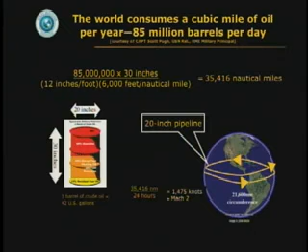Now take out all the bends, so it's simply a 20-inch pipeline 1.5 times around the world. And to get 85 million barrels to flow that distance in 24 hours, they have to be going at Mach 2, twice the speed of sound. That helps you visualize that much oil flow.

And this naturally gives rise to various problems. So a lot of unlikely folks have been popping up lately to say we've got to do something else, for many good reasons. But I want to start with a little bit of economic history.

In 1850, the fifth biggest industry in the United States was whaling, and most houses were lit with whale oil. But as whales gradually got shy and scarce, and first the sperm whales and then the other kinds started to get pretty hard to find, the price of whale oil drifted up, eliciting competition from a lot of things, but most of all, oil and gas, both made at the time from coal.

Remember, this is long before Edison's electric light. And in the 9 years before Drake struck oil in Pennsylvania in 1859, that competition grabbed away from whale oil over 5/6 of the lighting market.

The whalers were astounded to run out of customers before they ran out of whales. They hadn't been paying any attention to the competition. They were soon reduced to begging for federal subsidies on national security grounds, and the remnant whale populations were saved by technological innovators and profit-maximizing capitalists.

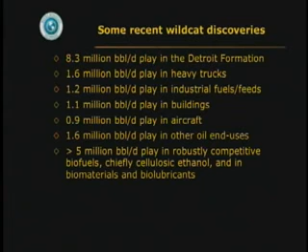So my wildcatters have been out drilling lately, and they found 8.3 million barrels a day in an undrilled play under the Detroit Formation. And they found 1.6 million barrels a day in heavy trucks, and 1.2 in industrial fuels and feedstocks and so on. Altogether, a huge amount of negabarrels down there, savable oil, plus a big play in robustly competitive biofuels, and 12 trillion cubic feet a year of gas that we found in places like air conditioners.

More on that later. So shouldn't we drill the most prospective plays first? I mean, wouldn't it be kind of embarrassing to go to the ends of the earth to drill for very expensive oil that might not even be there, and somebody else finds all that oil lurking under Detroit?

So in 2004, we published a detailed study that's independent and peer-reviewed. All the numbers are clearly laid out. Nobody's argued with it. And it was co-sponsored by the Office of the Secretary of Defense and the Chief of Naval Research, written for business and military leaders, not for politicians. They can hear about it in due course from their constituents.

And we built the argument around competitive strategy business cases for cars, trucks, planes, fuels, and military. You can get the whole book and all its 24 technical backup annexes free at oilendgame.com. And its thesis is arrestingly simple: that over the next few decades, say by the 2040s, this country can eliminate its use of oil and have a much stronger economy, and that transition will be led by business for profit.

Here's what it might look like. The upper red curve is the use of oil, the lower dashed red line is the imports of oil to the United States, and in the official forecast they keep heading toward the northeast corner. But we showed how to turn these curves downwards along the green curve by redoubling the efficiency of using oil, already doubled since 1975.

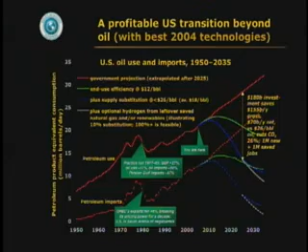At the same time, as a free byproduct, it would cut America's CO2 emissions by 26%. It would get us 1 million new jobs, mainly in rural and small town America, doing the biofuels. And we'd get to save 1 million jobs now at risk, mainly in automaking, where we have a really simple choice: do we want to keep importing efficient cars to displace oil, or do we want to make efficient cars and import neither the oil nor the cars?

That somehow sounds like a better idea. We found the business case for these actions is so compelling that this strategy could be implemented without new fuel taxes, subsidies, mandates, federal laws, or anything else either party doesn't like or could mess up. That is, such public policy as is desirable to support rather than distort the business logic could all be done administratively or at a state level.

Now, technologically, the nub of the problem is, of course, transportation. Vehicles use 70% of the oil. But we found that a common technological strategy of low mass, low drag, and advanced propulsion could triple the efficiency of cars with a 2-year payback, trucks with a 1-year payback, and planes with a 4 or 5-year payback.

Often with improved performance, for example, this Opel carbon fiber diesel hybrid Eco Speedster would get 155 miles an hour and 94 miles a gallon, although not at the same instant.

And the surprise to many is that the ultralighting that doubles the efficiency of these carbon fiber concept cars is free, because the costlier materials, as I'll explain, are paid for by simpler automaking and a 2 or 3 times smaller propulsion system. There are, of course, other big savings in buildings and industry, but I've talked about those the last 2 nights and won't revisit them here.

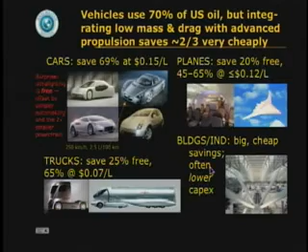Let me concentrate just on cars, then on trucks and planes. And the technology for all of these kinds of efficiency is continuing to improve faster than we use it up, so that efficiency, unlike oil, is an ever bigger and cheaper resource.

Of the projected increase in the use of oil in this country to 2025, 70% of it is from light trucks and heavy trucks. So you won't be surprised that I'm going to say a bit about both of those. You can see the use projected for cars is essentially flat, and the second biggest growth area after trucks is air travel.

Just a word on basic automotive physics, because I know there are a number of engineers and physical scientists in the house.

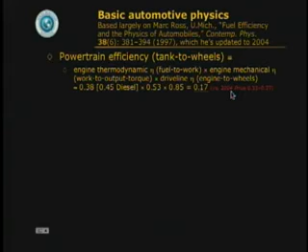The powertrain efficiency from the fuel in your tank to the wheels of a car or light truck is the product of the fuel to work efficiency of the engine, times the work to output torque efficiency of the mechanical part of the engine as opposed to the thermodynamics, times the driveline efficiency in transmitting torque from the engine to the wheels. And with an auto engine running on gasoline, as opposed to the somewhat more efficient diesel, this works out to about 17%, although a modern Prius hybrid does about twice that well, if you drive it properly rather than the way Consumer Reports says to.

Now, the vehicle load, what it takes to move the vehicle, technically known as the tractive load, is almost all of the energy you have to get out of the fuel, but a few percent is to run accessories, air conditioning, lights, entertainment, and so on.

The tractive load, in approximate terms, in instantaneous mechanical power, has four elements. The inertia is what it takes to accelerate the car, which depends on its weight. It's F equals ma. Then there's the rolling resistance experienced by the tires, which again depends on the efficiency of the tires and how hard you press down on them, which again depends on weight.

Aerodynamic drag rises as the cube of speed, and if you're climbing a hill, you have to allow for that too. I'll neglect it from here on the assumption that uphill and downhill balance over time. Both the inertial and the grade loads can be negative if you go downhill or decelerate, and a Prius, for example, recovers that energy with an efficiency of two-thirds from wheel to wheel.

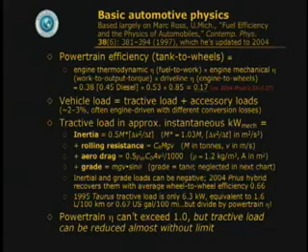Now, it only takes about 6 mechanical kilowatts of tractive load to run a Taurus, which is equivalent to two-thirds of a gallon per 100 miles. That's awfully good. But you have to divide by the powertrain efficiency, so it's 6 times worse than that. The important thing to remember is that you cannot make the powertrain more efficient than 100%, but you can reduce the tractive load almost without limit by making the car lighter and more slippery.

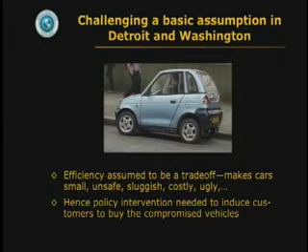I think the U.S. laggard position comes from the basic assumption held by most people who make cars or car policy that to make cars efficient, they have to be squinchy, unsafe, sluggish, costly, ugly. You wouldn't really want one. So the government has to induce you to buy this compromised vehicle anyway through either efficiency standards or high gasoline taxes. And of course, the titanic lobbies behind these two positions, automakers favoring high gasoline taxes, oil companies favoring high CAFE standards, have battled each other to a draw for over 20 years.

But there's another way to think about technological change. How many of you still buy phonograph records as opposed to digital media, or cathode ray tube televisions instead of flat screens? When you improve the technology enough, you can do an engineering end run around normal considerations just by redefining market expectations.

So you'd want to buy the super efficient car, efficient as a byproduct of breakthrough engineering, because it's better, not because it's efficient. That would give automakers a much more robust business model, because they would only need to worry about competitive superiority rather than random variables they can't control, like oil price and public policy.

So to see how to do this, let's look at the physics of where the gasoline energy goes, bearing in mind that your car every day burns roughly 100 times its own weight in ancient plants.

Well, seven-eighths of that precious energy never gets to the wheels. It's lost in the engine, idling, driveline, and accessories. Of the one-eighth that does reach the wheels, half of it either heats the tires and road or heats the air that the car pushes aside, and only the last 6% actually accelerates the car and then heats the brakes when you stop.

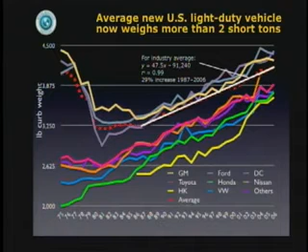We have a lot of relearning to do, because here's what's been happening to the weight of cars sold in the United States, cars and light trucks actually. They now average over 2 tons. We even looked, thanks to our analyst Laura Schul, at something I hadn't seen graphed before, which is the density of cars and vans, namely their curb weight divided by their interior volume. You notice it's been going up.

Density? How does that help anything?

70% of this increase in weight that we're seeing is due to design and materials, only 30% to changes in the size and the mix of vehicles bought.

Well, if you want to make cars lighter to capture the basic physics advantage, there are 3 broad things you can make it out of. Light metals like aluminum, which are perfectly feasible, a bit more expensive. New generations of light steel, special alloys, and heat treatment. Or the strongest and lightest solution, advanced composites, reinforced, for example, with carbon fiber.

That's what this handmade SLR McLaren from Mercedes is made of. It happened to get T-boned by a Golf, which was totaled. All that happened to the McLaren is it popped off a side panel, which they'll pop back on and fix the scratch later. But if you were to look under the hood, you would find at the front corners there's a pair of...

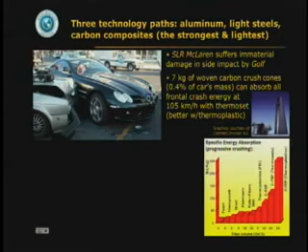...about 7 kilogram woven carbon fiber crush cones. To crush these down into a kind of a plastic cow patty takes so much energy that these cones, weighing only 0.4% as much as the car, can absorb the entire crash energy of the car hitting a wall at about 65 miles an hour.

That, by the way, is with a thermoset composite, like epoxy, which absorbs only half the crash energy per pound of a thermoplastic composite, which I'll be talking about. That absorbs 12 times the crash energy of steel per pound, and it does so more smoothly, so you can use the crush length or stroke up to twice as effectively.

So with such magic strong but light materials that decouple size from weight, you just solve the safety riddle. That is, you can make cars big, which is protective and comfortable, without also making them heavy, which is hostile and inefficient. Therefore, you can save oil and lives and indeed money all at the same time.

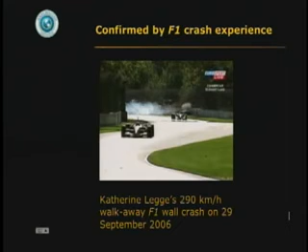Anybody who follows the Formula One race world knows about this. Here's a shot of Katherine Legge running into a wall in an ultralight carbon fiber car at 180 miles an hour.

By the way, her car is made of epoxy carbon or thermoset, which is subject to brittle fracture, and it's not nearly as tough as our thermoplastics. But, you know, that's not very promising with a person in there. And the best news is that Katherine Legge has walked out of the medical center under her own power.

How are you feeling? A bit shaken, but I'm okay, as you can see. Oh, sorry, all my bits are intact, so it's good. Goes to show how strong the cars are. Where do you have some injuries? Oh, I just banged my knee. Car upside down, you bang your legs on the bulkhead and on the steering column and stuff, so just a bit of bruising, which won't look too attractive in my dress at the Atlantic's banquet tonight, but...

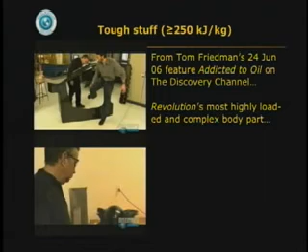So, and in fact, Tom Friedman, in a film called Addicted to Oil on the Discovery Channel, was playing with some of these materials in the lab of a little company called Fiberforge that spun off from RMI. And first of all, he took the most complex and highly loaded body part, and showed that he could lift it with one hand.

I can't lift this. Sure you can, it's not steel, it's carbon fiber. Whoa! I'm strong, I'm not that strong.

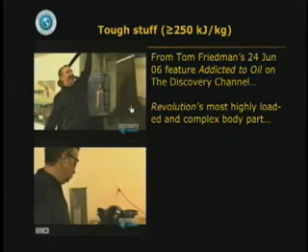And then he tried to do some damage to this piece of material, which is actually tougher than titanium. So here's the part we just formed, Tom. But once it's trimmed, it can look just like these other parts. You say these things are tough, right? Oh, they're very tough. You're gonna see just how tough.

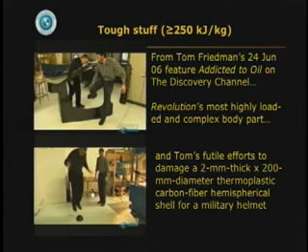I'm gonna break one of these. Just plastic. You want to try jumping on it? Sure. Here, why don't you try jumping on it on the floor? Somebody got a bigger hammer? Here, give me that.

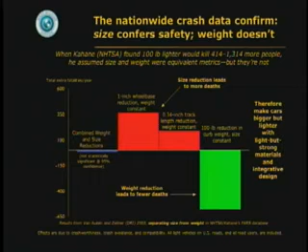Now, the problem with these advanced composite materials has always been cost. We use them a lot in military and aerospace at about 1,000 times lower production volume and higher cost than you would need for ordinary cars. In fact, the advanced composite market in the U.S. is about as big in tons as the chocolate market. This is pretty specialized stuff.

But then I got encouraged about maybe bridging this cost gap when I met a young engineer at the Lockheed Martin Skunk Works, where they make the not quite impossible military aircraft. He had led a team that in the mid-90s had designed an advanced tactical fighter plane airframe that was 95% carbon, 1/3 lighter, but 2/3 cheaper, because it was designed to be made optimally out of carbon, not metal.

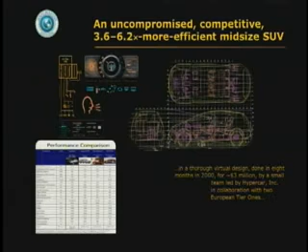It was so weird he couldn't find a military customer for it, so one batch later I was able to hire him to lead a similar effort for cars, which we did. The result was an uncompromised, competitively priced, 3.6 to 6.2 times more efficient midsize SUV, done as a virtual design with 2 Tier 1 partners in Europe in 8 months in the year 2000 for about $3 million.

And here's what it looks like. This is a 5-seat, mid-sized suburban assault vehicle, weighing a little less than half as much as the equivalent steel vehicle, because it would be made out of carbon fiber composites.

0 to 60 in 8.2 seconds, 114 miles a gallon on hydrogen fuel cell, or if you ran it on a gasoline hybrid like a Prius engine, it would do 0 to 60 in 7.1 seconds and 67 miles a gallon on gasoline. And that version would have an extra sticker price of $2,500, as we ascertained from actual bids for parts, as I'll tell you later.

That would pay back in under 2 years at U.S. gasoline prices. So this was production costed, manufacturable, and it can look like whatever you want. This is what's called in the trade the active outdoor lifestyles Gen X, Gen Y crossover vehicle, at a time when crossover vehicles were kind of a gleam in the eye.

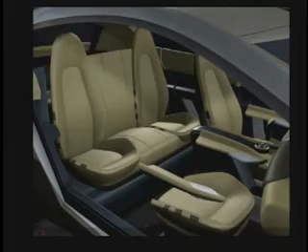Now there are a lot of things on the road that look very much like this. We're flattered. If you were to fold down the right seats as well as the rear seats, it gets so cavernous you can put in 2 full-sized kayaks and 2 people.

We'd prefer to control and steer it with a left side stick, or if you're British or Japanese, you can stick them on the right. There's a virtual display, everything by wire or by fiber, all functionality in software. It's a computer with wheels, not a car with chips. Sony PlayStation 10, way cool.

But it has some other interesting attributes. I mean, if all U.S. cars were this efficient, cars and light trucks, it would be like finding a Saudi Arabia under Detroit. And worldwide, the potential from this kind of efficiency is as much oil saved as OPEC now sells. So that's a big deal.

And again, to get back to the physics, an ordinary car takes about a liter of fuel to drive 12 kilometers on level city streets, but you see only, in this case, about 12% gets to the wheels.

The industry has always focused on the losses, 85% loss or so, in the powertrain for the same reason Willie Sutton robbed banks. He said that's where the money is. This is where the losses are.

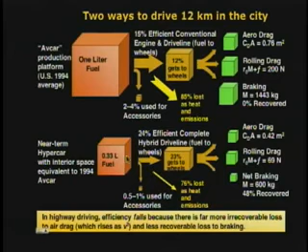But you'll appreciate from the last two nights' lectures where I've emphasized the compounding savings from starting downstream that we should really start at the wheels, because every unit of energy we can save at the wheels will save about 7 times that much fuel in the tank, turning those compounding losses left to right into compounding savings right to left, just as in the pumping diagram I showed last night. It's pretty straightforward, even with a doubled efficiency powertrain, where that's only a factor of 3.5 gain, not 7, to get a tripled efficiency car this way.

Of course, to get the real weight savings like this, you need to multiply weight savings and make them snowball. It used to be that you just do this once. You would make the car as light and slippery as you could think of, so you need less power to run it, and that lends itself to a smaller propulsion system, maybe with new technology, and the chassis parts like brakes and suspension get smaller. And because those things are all smaller, you can have more crush space in the same size car, more space for people and cargo as well.

But you might think it costs more for all the obvious reasons. What we do, however, is work the design cycle, or as they say in naval architecture, the design spiral. You go around this loop a few more times, and as you do so, you start multiplying weight savings, because you're not only making parts smaller for lower mechanical loads, you're getting rid of a lot of parts. In a good hybrid, you may, for example, eliminate things like transmission, clutch, flywheel, axles, differentials, drive shaft, universal joint, starter, alternator. They just go away with their weight. Therefore, you get these nonlinear jumps in weight savings.

And by the time you get through, you're using so little of the costly light materials, such a small powertrain, and you save so much money in simpler assembly and getting rid of parts and systems that you get a very reasonable and maybe even a lower cost.

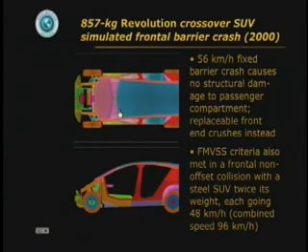Or if you run into a steel SUV twice your weight, each going 30 miles an hour, combined speed 60, you would still be protected from serious injury according to these simulations. I'm not sure there's any car on the road that does that.

Now, that's all possible because of an ultralight composite body, which in this case also has an aluminum drop-in subframe in the front, so that we can use a variety of propulsion systems and have them all fit the same hard points and have a more easy to analyze front-end crush behavior. And this body is incredibly stiff, stiffer than practically any sports car, so it would handle extremely well, and it's designed for an extremely long life, doesn't dent or rust or fatigue, and if you ran into somebody in the parking lot at 6 miles an hour, it would be a fender bouncer, not a fender bender.

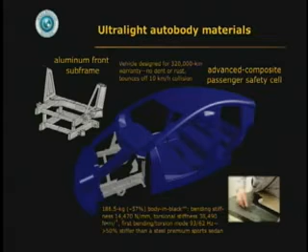Now, the really fun part is how you make this body. You notice, first of all, that its heritage is that of an airframe. It's suspended from rings rather than built up from a tub, which is our horse and buggy legacy. So it's extremely strong and stiff.

And each of those parts, other than the floor tub, can all be lifted with one hand and no hoist. In fact, the biggest part here on the side that Tom Friedman was lifting, I've been able to lift with one finger. Each part is made with one low-pressure die set. In a steel body, you'd have 10 or 20 times as many parts, each with an average of 4 progressive steel stamping die sets. So you just saved about 99% on the tooling cost.

And the parts then snap precisely together like a kid's toy for either gluing or non-adhesive thermal bonding. And because they fit together and align themselves, you don't need the jigs, robots, and welders normally needed to assemble and spot weld the body.

And if you lay color in the mold, you get rid of the paint shop. So you end up with at least a 2/5 lower capital cost than the leanest plant in the industry. And the plant's smaller. In fact, the optimal size, around 50,000 a year, almost exactly matches the average nameplate production volume in this country. Now, there's been rapid progress with these kinds of materials.

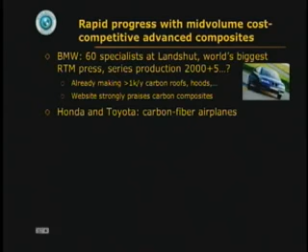BMW has 60 specialists in Landshut who have bought the world's biggest resin transfer molding press, probably not for amusement. They said in 2000 it would take them maybe 5 years to get their carbon fiber concept car into series production. It seems to be taking a bit longer, but they're already making over 1,000 a year of various parts for high-end models, and their website praises carbon composites in quite un-Germanic language. Honda and Toyota put their best automotive innovators in charge of their respective carbon fiber airplane businesses. Now, why do you suppose they would do that if it's all about airplanes?

Ford has demonstrated remarkable capabilities in the GT with carbon fiber composites and combining them with light metals. And FiberForge, a little spin-off in Colorado from Rocky Mountain Institute, has come up with a process I'll show you videos of in a moment that uses kind of a digital inkjet printer to make a carbon and thermoplastic like nylon plywood.

This is from a 1 square meter piece, uniform to better than 10 microns in thickness. And then it's thermoformed to net shape on a half-minute or 1-minute cycle time, matching the pace of an auto assembly line. So you get 80 to 100% of the performance of hand layup aerospace composites at 10 or 20% of the cost, and with very interesting economics, which have caused a number of automakers and tier ones to become customers. And meanwhile, the company's making things like backpack frames.

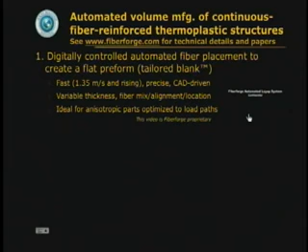That's a car seat for a tier one, Johnson Controls, shown at the Detroit Auto Show. And the first step is to make this tailored blank, which combines layers of carbon and or other fibers. For example, you can cut the cost very substantially if you have carbon layers around a cheaper glass center. And this is all run straight off a CAD drawing. And you can make variable thickness parts, different thickness in different places.

I've lost the sound again. But I guess hearing the machine will not tell you a whole bunch about it. But it's laying carbon pre-preg and semi-preg tape, and ultimately could be able to lay raw carbon fiber and thermoplastic at about 1.4 meters a second, and then it'll become faster.

So because you can control exactly the direction of the fibers in different layers, you can make the strength and stiffness match the load path. So if you want to make that car seat, for example, your computer analysis tells you you need different layers with fibers pointing different ways, and then you make it on the machine to a tailored blank, and then you form it in the next step into the shape you want and into the finished part.

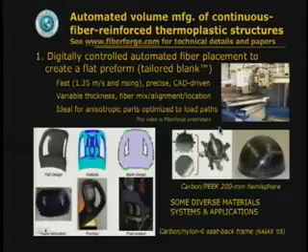So this bowl sample, for example, was made out of a flat piece like this, which could even have non-uniform thickness, thinner in the middle than at the edges. Now, the molding step is quite straightforward, and for ease of visibility, we'll show it here with a fiberglass instead of a carbon fiber part because it's easier to see white than black. So when you've made your tailored blank, you just shuttle it into the oven where it's heated with an array

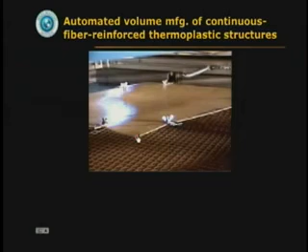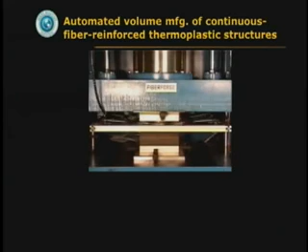of programmed heat lamps. And when it just starts to droop a little from heat, because the nylon or whatever is getting soft, then you shuttle it into your press where you squash it onto a hot die. And the fibers flow where they're supposed to, and then you quench the die by passing cold water through it. And about a minute later, the roast is done, so you reach in with your oven mitts and take it out of the oven, and you trim off any loose bits you don't want, which in this case we weren't at pains to minimize because this was a cheap material, and then you're left with your finished part, and it's that simple.

So very high materials efficiency, low scrap, and so on.

Now, so far, it will have become clear that there are some Zen riddles here around making cars. Like big fuel savings can cost less than small fuel savings. You can tunnel through the cost barrier through integrative design. To leap forward, think backwards. Start at the wheels and think back toward the fuel tank. This one is like the Taoist remark that by doing nothing, nothing will be left undone.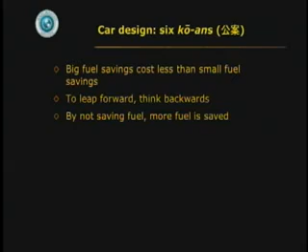If you set out to save fuel, you will probably make incremental savings slowly at some extra cost. But if you set out to make a breakthrough integrative design of a car, you'll save a lot more fuel as a byproduct. And of course, to make cars cheap, you should use costly materials. And to make them safer, you should make them a lot lighter. And to get the best cars, just let the engineers go at it. So you get an automotive leapfrog.

Now, to find out what it would cost to make such a car, FiberForge had its Tier 1 partner put out the design at almost a 500 line item level of detail in anonymous cost packs to the industry, to ask what would the supply chain charge to make 50,000 a year. And from that, we learned that the extra cost of ultralighting the car is absolutely trivial.

In this case, it's a 1.6% price increase at retail. That's down in the noise. If you made it a gasoline hybrid, it would cost about $2,500 extra because it's hybrid, not because it's ultralight.

If you made it a hydrogen fuel cell car using rather expensive fuel cells by present standards, then it would save not 72 but 83% of the gasoline. But it would still be like buying gasoline at about $2.11 a gallon, which isn't such a bad deal.

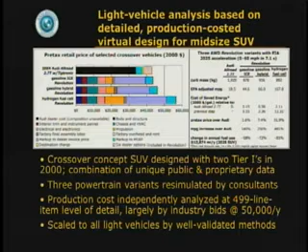So if you look at the extra retail price you have to pay for the car versus how efficient it is, we're used to seeing from the National Academy curves showing that you can save a significant amount of energy at a modestly extra price. Some other folks with a better track record thought you could do better. And we did look at incrementally improved Academy mobiles that would save about a quarter of the fuel and pay back in a year or so.

But then we said, wait a minute, suppose we start with a Prius propulsion system at 2004, or what Toyota then projected as 2007 prices, which have turned out to be true. And now let's put it in an ultralight slippery carbon body for a light truck or a car. The car gets about 92 miles a gallon instead of 55 for the Prius. In other words, almost doubled efficiency, but we're going to the right, not up to the right. The car costs essentially the same. This whole design space on the right, the ultralight space, does not add cost because the cost of your materials are offset by simpler manufacturing and a 2 or 3 times smaller propulsion system.

Now, there's a backstop technology in case the composites are not ready for prime time, and that's good because I'm materials neutral, and I happen to think composites are a good bet strategically for a bigger leapfrog because of their strategic advantages in manufacturing, but the market will sort out what materials win, and one of those could be ultralight steels.

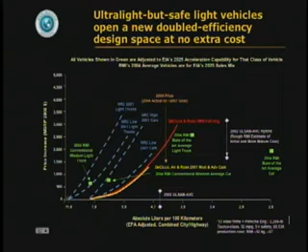So it would be quite a worthy competitor. And since everybody knows how to make cars out of steel, this at least can give us assurance that we will be able to get most of those fuel savings one way or another.

In fact, light steel is what some innovators in Munich used to figure out a 2+2 seat sports car, quite lightweight, very good aerodynamics, and without a hybrid but with a turbo diesel, they felt that they could get very good Autobahn high speeds and yet very good miles per gallon also, 87 or 157 in the two models, and it would sell for about 11 to 15,000 euros in 2009.

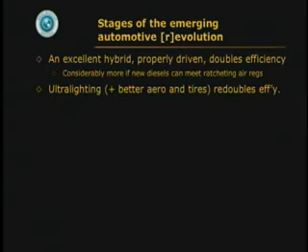Watch this space. Now, the automotive revolution then can start with an excellent hybrid, properly driven, that doubles efficiency, a good deal more if new diesels turn out to be able to keep up with ratcheting air quality rules. If you make it ultralight with better aerodynamics and tires and integrative design, you roughly redouble its efficiency.

If you run it on, say, 85% ethanol, preferably from cellulose, you quadruple its oil efficiency again. So far you've saved a factor of 16 on oil per mile, and you could actually use the biofuels, if properly produced, as a way to take carbon out of the air and put it back in tilth where it belongs, and pay the farmers for that.

Now, a good plug-in hybrid, and they may be coming at us sooner than we think, can redouble or better fuel efficiency again by substituting cheaper electricity for ordinary shortish trips. And if you make the power grid set up so that it can buy the distributed storage capacity of the batteries, and maybe even own them as a utility asset, then that could be attractive economically, and that's a precursor of the vehicle-to-grid fuel cell play, with power plants on wheels.

Now, so far, these stages of development can save 97% of the oil per mile that we use now. And of course, hydrogen fuel cells can also be competitive once you have such efficient cars, and can act as very good power plants on wheels, and can displace the E85, so they'll get to compete with biofuels and with plug-in hybrids. Hydrogen does actually become a serious competitor when the car gets that efficient.

Here's the packaging diagram for that SUV, which takes only a third the normal power to run it. In fact, you can cruise it at 55 miles an hour on the same power to the wheels that a normal car uses on a hot day to run the air conditioner. So with these small hydrogen tanks, which leave plenty of room for people and cargo, you get a normal 330-mile driving range.

You don't need any breakthrough in storage. You don't need ultra-high pressure tanks. Moreover, the fuel cell gets very much smaller, 3 times smaller, so you can pay 3 times more per kilowatt for it. So at a normal assumption about cost versus volume, called an 80% experience curve, you would need 32 times less production volume to get the price down to a competitive level.

And that'll cut a decade or two off the deployment time. Exactly the same logic, by the way, applies to hybrids, plug-in hybrids, and battery electric vehicles. Whatever your expensive propulsion system is, you'll need several times less of it, so its economics and packaging will become that much easier.

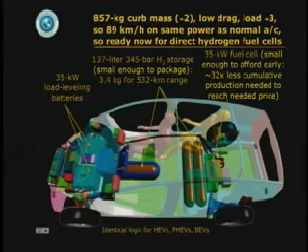And if you just compare, say, this fuel cell design at 35 kilowatts with the much higher fuel cell requirements in other concept cars, whatever you assume the fuel cell system costs, you'll obviously be saving a lot of money, and yet you'll get a better range, which is why we put such emphasis on the physics of the car, especially the weight.

So I dare say that whichever automaker goes ultralight first to integrative designs is going to win the fuel cell race. Or to put it another way, an automaker doing research in fuel cell cars will do better to put its money into making the car lighter than trying to make the stack cheaper and the tank smaller, because they'll get to the same place with much less time, money, and risk.

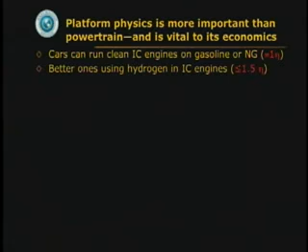It's also important to understand that the platform physics is more important than the powertrain and is vital to its economics. If you consider 1 eta, eta being efficiency, as the efficiency level of today's good cars, you might get 1.5 eta if you did as some BMW models do and burned hydrogen in an internal combustion engine, optimized for that. If you made that a hybrid, maybe 2.5 eta. But if you make it ultralight, you're already at 3 eta. Hybridize that, 3.5 or 4.

In fact, that 5-seat carbon SUV design I showed you a minute ago has the same mass and the same drag coefficient as my 2-seat aluminum Honda Insight hybrid. That's how light carbon is. Imagine being able to run a 5-seat SUV on a 1-liter engine. That's about what you could do this way.

Best of all, of course, is to put it all together, put fuel cells in those super efficient bodies to get, in this case, a 6.2-fold efficiency gain. Remember that the aim here, when you think about whether hydrogen will work and pay, is not just to save fuel and pollution. There are strategic goals in automotive competitiveness, automaking competitiveness, plug-in power plants on wheels, getting off oil, being able to use any primary fuel to make the hydrogen, accelerating the transition to renewables. Hydrogen needs these very efficient vehicles a lot more than they need hydrogen.

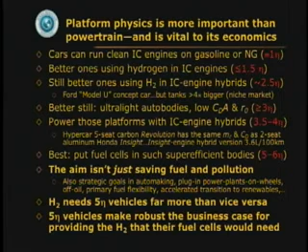They can run on anything, but once you have the efficient vehicles, there is a robust business case for running them on hydrogen fuel cells. But meanwhile, there's competition from other more conventional kinds of powertrains.

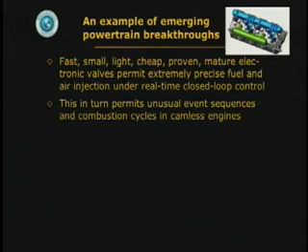Here's an example: there's a very good mature technology for very fast, small, light, cheap digital valves which permit extremely precise control of both fuel and air injection under real-time closed-loop control. That would enable you to make an internal combustion engine, even retrofitted with such a digital head and no cams, to do unusual combustion cycles expected to be half again as efficient as a diesel, burning any fuel including gasoline or ethanol on the fly, with upwards of half again as much torque, but at least a third smaller, 10% cheaper, and extremely low emissions that don't even need cleanup devices.

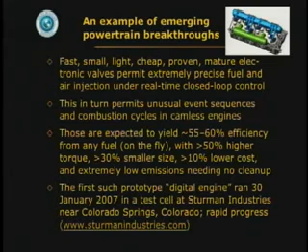The first prototype of such an engine actually ran near Colorado Springs in late January and should be much further along by the end of the year from Sturman Industries, so watch that space too.

And a little more about plug-in hybrids - hybrids that have a bigger battery so you can take short trips just on their electric range. The key to making this efficient and affordable is a light, slippery car. Plug-in hybrids can further improve the efficiency of the powertrain and can be comparable or lower in carbon emissions per mile compared to a fueled car.

You can charge them with cheap off-peak electricity. You can sell their valuable storage back to the grid at peak hours, and under certain assumptions, this may be able to pay for the batteries.

Plug-in hybrids, by adding off-peak storage to the grid, also greatly expand markets for variable renewables. You could sell an extra several hundred gigawatts of wind power this way. This does need a smart garage or its equivalent so the car can talk to the grid properly, because the grid right now is not as smart as we would like.

But here's what it could look like in California. Here's a typical summer load shape with the night trough and the afternoon peak. Now, if you put in 5 million plug-in hybrids, not terribly efficient, or 15 million super efficient ones, you would fill the night valley, and all that extra is wind power you could be using instead of spilling. Then if you use the distributed storage function to sell power back to the grid during the hot afternoon peak, when and where it's most valuable to do so, you can lop off that peak.

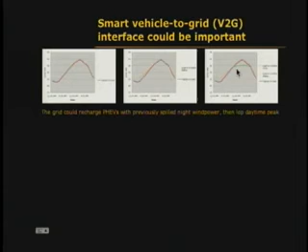Well, this would be a wonderful thing for utilities. Remember, cars are parked about 96% of the time. And the batteries or equivalent fuel cells in a super efficient light vehicle fleet would have 6 to 12 times the storage or generating capacity that's on the grid right now. So it doesn't take many people doing this vehicle-to-grid trick to displace coal and nuclear plants, and roughly the first 2 million drivers to do this are going to earn back roughly the whole cost of their car.

And because this suite of technologies can address the power plant two-fifths of the carbon problem as well as the transportation nearly two-fifths, ultimately this can solve up to about two-thirds of the world's carbon dioxide problem. Utilities, of course, love the other way.

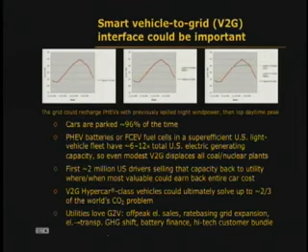They love the grid-to-vehicle model, which will work regardless - that's where you're charging the battery of a plug-in hybrid vehicle, because they get off-peak electric sales. They may get to rate base some more grid expansion. They get to shift greenhouse gas burdens from the power to the transport sector. They may make money financing the batteries, and they can offer a high-tech customer a service bundle, including more efficiency in your house and solar cells on your roof. That would be something to brag about.

Now, let me talk a little about the competitive posture of the auto industry. This product is really incredible - we make one of them every 2 seconds. They're the highest expression of the Iron Age. It's a $1 trillion global industry, the most complex industrial undertaking in the history of the world, the most complicated mass-produced artifact in history. But it costs less per kg than a McDonald's quarter-pound hamburger. And it's quite durable and meets conflicting requirements with great skill.

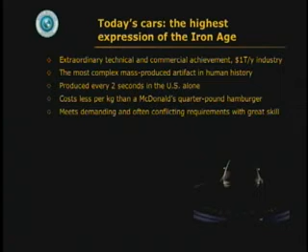But there are a lot of reasons for fundamental change now emerging in this industry. Just think, it's got convergent products fighting for shrinking niches in a saturated core market at cutthroat commodity prices, with stagnant basic innovation until quite recently, and growing global overcapacity of about a third, forcing increasing consolidation.

We're already seeing buyouts by private equity firms, and yet thin profit margins most of the time limit the attractiveness to investors and to recruits. It's kind of like airlines, a great industry but a bad business. It's time for something completely different, as investors are now realizing.

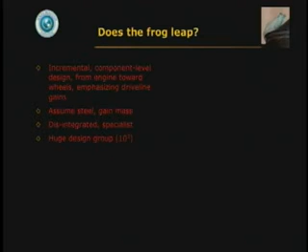So can we make this frog leap? The way we design cars now, because it all depends on design, is very incremental, component-level design, reasoning from the engine toward the wheels, emphasizing powertrain improvements because that's where the losses are. The car is generally assumed to be made of steel, so it keeps getting heavier. And the design process is disintegrated, a whole bunch of specialists, a thousand, ten thousand specialists, in a huge group, each passing the baton to the next specialist, so the synergies get lost. You get institutionalized timidity, baroque complexity, and that makes it hard.

There's another way to design a car: on a clean sheet, whole system, from the wheels back, emphasizing great platform physics first, especially ultralighting, to maximize the snowballing of weight savings. Designing the car in an integrative, holistic fashion in a tiny group, maybe tens or a hundred people, in a team play, not a relay race, capturing the synergies and boldly going for radical simplicity.

That's also difficult. Einstein said everything should be made as simple as possible, but not simpler. You only get to simplicity through complexity. We're now deep in the complex phase; it's time to break out into the simple phase. Oliver Wendell Holmes said, I wouldn't give a nickel for the simplicity this side of complexity, but I'd give my life for the simplicity on the other side of complexity. And it's really time now to make the design simple.

It's going to be hard to make a great car no matter how you do it, but I'd rather have it difficult because it's simple than difficult because it's complicated.

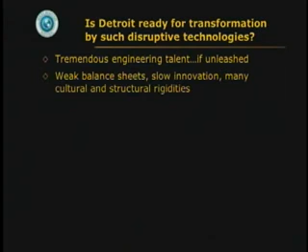Is Detroit ready for this kind of disruptive thinking? There's huge engineering talent there if it's unleashed. There's also really weak balance sheets, slow innovation, lots of rigidities, and a tendency to treat sunk costs as unamortized assets, as if it's better to write off obsolete stuff later when you don't have a company than now when you do. Obviously, we ought to be basing strategic choices on economics, not accounting.

It's important not to count cost per pound, as they normally do in Detroit, because nobody buys cars by the pound, they buy the car. There's also incoherence in these businesses in which the lobbying and litigation arms tend to stomp on internal innovation and be directly contrary to corporate strategy. There are lots of examples of this.

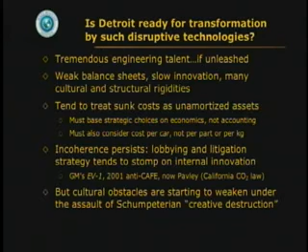But I think these cultural obstacles are wilting under the force of what Schumpeter called creative destruction. It's a whole tsunami of change rolling over the industry, and that is what is going to change things in a hurry. Let me give you an example of an industry that did that successfully, and that's airframes.

Boeing in 1997 was just where the big three automakers are now, and Boeing Commercial Airplanes made some difficult changes, including the Toyota production system, and they got their costs back under control. But what was in the pipeline after the 777? What about growth? Airbus just four years ago was already outproducing Boeing, and some commentators were saying, is Boeing going to be around for the long haul?

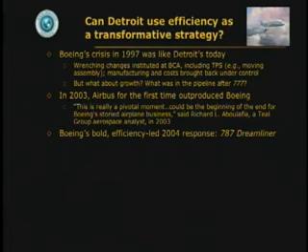Their bold and quite unexpected response was a leapfrog, a very efficient airplane, very simplified, saving a fifth of the fuel at the same price, half advanced composite by mass, a lot of advantages for customers. They switched over from hydraulics to electricals. They made a lot of things simpler. They cut the final assembly time from 11 days to 3. And this airplane has taken off in sales faster than any in history.

It sold out till 2013. And now those radical changes throughout the integrative design are being rolled out to every model Boeing makes in the Yellowstone project. That'll be across their whole product line before Airbus, which made mistakes in both strategy and execution, can get itself out of the ditch — and it may be too late by then.

So could Detroit do, even to mighty Toyota, what Boeing did to Airbus? Funny thing, we suggested in 2004 that Detroit think about imitating Boeing. Two years later, the head of Boeing Commercial Airplanes became the CEO of Ford Motor Company.

And he said, we can't do the regular Detroit turnaround thing where you just shutter a few factories and hope for a hit model. He said, we need to make completely different products in a completely different way. He arrives with transformational intent.

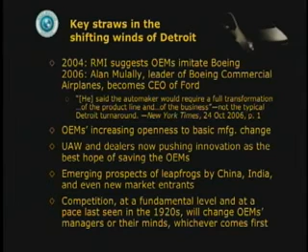And the automakers are increasingly open to basic change in manufacturing and materials. The dealers and the union are now pushing innovation as the best hope of saving this industry. And of course, the emerging prospects of leapfrogs by China, India, and other new market entrants concentrate the mind. So this competition is going to change the automakers' managers or their minds, whichever happens first. And that's starting to happen. I'm very encouraged about it.

Just a little about trucks and planes. It's the same story: better aerodynamics, better tires, better engines, and so on, a bit less weight, not using exotic materials, but just so you can haul more stuff in fewer loads. And that will take you to a doubled, or with operational improvements, roughly tripled efficiency, and it'll double the big haulers' margins. Tripled efficiency gives a 60% internal rate of return.

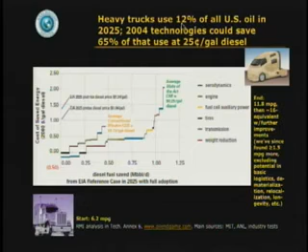Here's what the supply curve looks like. And this is a big deal because heavy trucks use one-eighth of our oil, and it's the second fastest growing part. Now, again, the losses and savings multiply.

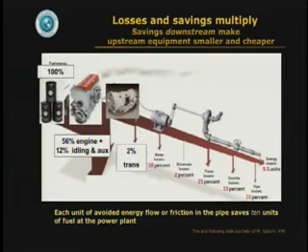Here's my pumping diagram from yesterday, where over 90% of the fuel energy at the power plant gets lost before you get flow out of the pipe. In the truck, it's the same deal. You start with a bunch of fuel going into a big diesel engine, and then you lose some more in the transmission and other powertrain or driveline components. And then two-thirds of your losses over the road are in aerodynamics and about one-third in tires. And you end up with only 6.5% of the original fuel energy actually moving the cargo, another 4.5% moving the truck.

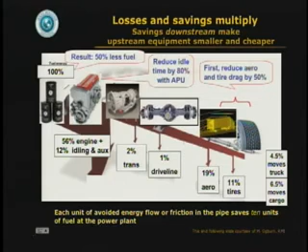So if you reduce the aerodynamic and tire drag by 50% and reduce the idle time 80% by putting in an auxiliary power unit, so you're not idling this giant diesel all night to run your radio and air conditioner, you save half the fuel right there. That's not hard. And you can tunnel through the cost barrier because as you go through these improvements in tires and aerodynamics and engine and so on, you end up with smaller engine, smaller fuel tanks, more stuff hauled, and you end up with superior economics.

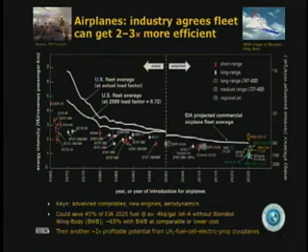But we found, the same as a number of industry studies, that you could double or triple efficiency with the same kind of prescription: advanced composites, new engines, better aerodynamics, better integrative design, and accessory loads. And there are a lot of conservatisms in this. We're not counting other things that are coming at us from the lab and look very promising indeed.

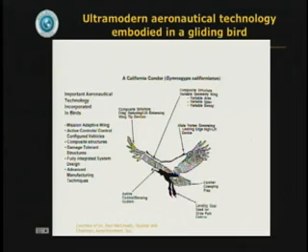In fact, a lot of what we're trying to do in these planes was already invented, guess what, by nature. Here's a California condor exhibiting, according to the great engineer Paul MacCready, who should know, some of the wonderful technologies that we need now to put into airplanes, including, if we really get good at it, advanced manufacturing techniques - hatch out our airplanes from big eggs. That would be really neat. I think the bird's smarter than we are about that part.

And there is, by the way, a world for airplanes after kerosene. We didn't assume this in our efficiency analysis, but you can actually do quite well with liquid hydrogen. It's bulkier but lighter, and everyone who's tried it, all the main airframe makers and NASA, agree that it's safer than kerosene in a crash. It's been tested by a number of folks, and Boeing found in a typical, say, 767 class, counting proper interactions within the design, that when you net out all the good and bad effects of switching to this bulkier but lighter fuel, you get about 10 or 15% better energy efficiency, which is about enough to pay for liquefying the hydrogen.

So it's pretty much a wash on net energy compared with kerosene. It's obviously much cleaner, although you are putting water vapor high up, so you may not want to fly all the way in the stratosphere, but just below the tropopause. Another good thing you can do besides jets is to use fuel cells for propulsion.

There's both NASA and Dutch work suggesting considerable efficiency gains, even a doubling for smaller aircraft, having basically very sophisticated electric turboprops with superconducting motors running on liquid hydrogen. That's another 20 to 50% fuel savings beyond our analysis from that change in fuel.

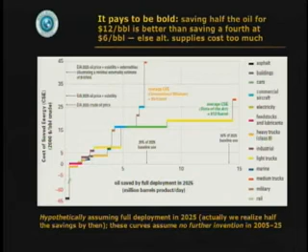It does pay to be bold in all these kinds of savings. If you use Academy kinds of 10 or 15-year-old technologies, you'll save a quarter of the oil in the country across all the range of end uses, transport and otherwise, and it'll cost you about $6 a barrel. But if you use the more advanced techniques I've described, which are already being surpassed by new developments in the last few years, you save half the oil at $12 a barrel. And that's a better deal, because if you didn't do that, some of the supply substitutions for the other half would cost too much.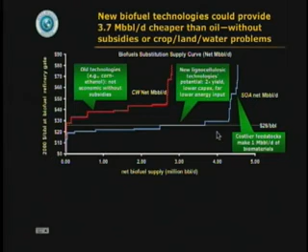Now, the biofuel side of the supply substitution, I'm not talking here about corn ethanol, which is a small, slow, costly, heavily subsidized resource, although improving. Rather, I'm talking about making ethanol and other things, maybe butanol, out of woody, weedy stuff like switchgrass and poplar, which gives you about twice the yield, less investment, up to 8 times better net energy yield, with some left over beyond 4 million barrels a day of fuel to displace petrochemicals.

And Brazil has already gone oil independent on the basis of offshore oil, plus displacing a quarter of its gasoline in energy equivalent with sugarcane ethanol, which started off with a pump priming subsidy that they've gotten back 50 times over. It's now very competitive without subsidy.

Sweden is headed off oil by 2020 via cellulosic ethanol based on forest waste. Europe is a much bigger producer than we are of biodiesel. Over half of it's sold by oil companies, and it's their way of shifting farmers from temporary subsidies to permanent revenues.

Now, here's how all the moving parts fit together in winning the oil endgame. Instead of needing 28 million barrels a day of petroleum products in 2025, we could by then have displaced almost 8 with efficiency at $12 a barrel and still be in the process of implementing the last 7 worth of savings. So not having done that part yet, we'd still need 20, of which we could get almost 4 from biofuels and the like, almost 2 from the no-brainer substitutions of saved natural gas that make sense at any price, almost 8 from projected domestic oil output from areas already allowed, and we'd still need 5 from somewhere. Where could that be?

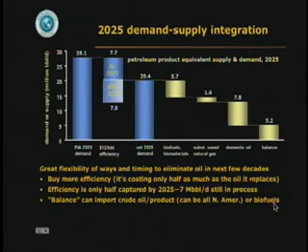Well, maybe we should buy more efficiency, it's so cheap, or wait a little longer and get the rest of it that we're still implementing by turning over the rest of the vehicle fleet. Or we could still buy oil from Canada and Mexico, or by then the World Trade Organization, probably long before that, will have made us drop our illegal 100% tariff on imported Brazilian ethanol, which is making them send it to Asia instead of here, which is a lot closer. This is to protect our corn farmers, of course.

Or, oh, wait a minute, I haven't yet accounted for 2/3 of the saved natural gas, and that would be enough if directly substituted for oil to cover this whole balance term. Or we could use that saved gas even more profitably to make hydrogen, which is more efficient in use and therefore could also displace all the domestic oil. Imagine being a net oil exporter again. And I'm not counting other options.

For example, there's enough available windy land in the Dakotas to make enough hydrogen cost effectively by then to run every highway vehicle in the country at these levels of efficiency.

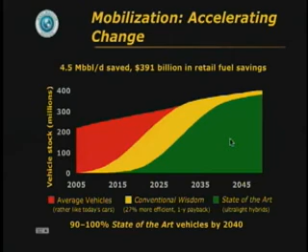So lots of options, and you can actually turn over the vehicle fleet quite satisfactorily with some policies we propose to speed it along. We get rid of the unimproved vehicles pretty quickly and jump over a brief interval of incrementally improved vehicles as we tooled up to make the tripled-efficiency ones, maybe even better stuff after that. They would pretty much capture the whole market by 2040, saving about $400 billion at the pump at $26 a barrel.

Now, big changes have happened quickly, even in this industry. It took the auto industry 6 years to switch from wood to steel auto bodies back in the 20s. It took them 6 months at the start of World War II to switch from making cars to making the jeeps, tanks, planes, and munitions that won the war. Boeing transformed the way it makes planes in 4 years, and they went from behind the 8 ball to having Airbus on the ropes in 2 or 3 years.

Amazing turnaround. GM's small team took the EV1 battery car from launch to street in 3 years. Now, normally, if you wait for normal technological diffusion through normal market mechanisms, it takes about 12 to 15 years to go from 10 to 90% adoption in the stock. But we figured out some policies that'll get to that 10% takeoff point about 3 years faster.

It is encouraging that the last time we paid attention, we were saving oil per dollar GDP over 5% a year. It's like a Gulf every 2.5 years at a given level of economic output. The biggest contribution to that was almost a 5% a year gain in the efficiency of our new American-made cars, 96% for making them smarter, only 4% for making them smaller.

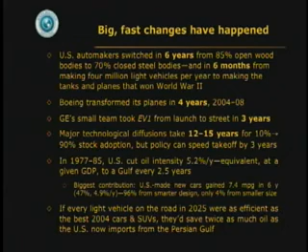As a reality check, if every light vehicle on the road in 2025 were only as efficient as the best hybrids in the showroom in 2004, they would save twice the oil that we now get from the Persian Gulf. That doesn't sound very hard, and that excludes all the continuing rapid innovation.

There's another dimension here I want to highlight, and that is the emergence of military energy efficiency as a major driver of civilian energy efficiency. There are things called strategic vectors in the military—these are disruptive changes that drive the revolution in military affairs. We've had 4 already: speed, stealth, precision, and networking.

The next one to come at us is going to be called endurance. That's the ability to stay out there a long time doing dispersed operations over big areas without dragging a heavy fuel logistics tail behind you.

The Department of Defense is very handicapped now by a half-century-old way of getting and using energy, designed for massive steel forces that, as Lord Curzon said, floated to victory on a sea of oil. In World War II, 6/7 of the fuel that defeated the Axis powers came from Texas. Today, warfighting uses 16 times more oil per soldier than it did then, and Texas is a net importer of oil.

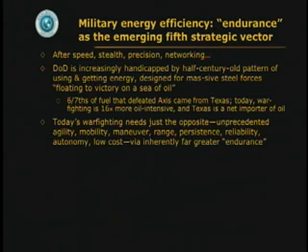Today's warfighting needs exactly the opposite of what the legacy force needs. We need an incredible amount of agility, mobility, maneuver, range, persistence, and so on, via much greater endurance. That fat logistics tail to supply the fuel is 70% of the tons that the military moves around, and logistics, moving stuff around, takes half the people and a third of the budget.

And this is now a magnet for insurgents. It's a big risk in military operations, and it's very expensive in lives and treasure. So the department now realizes it needs less or little or no reliance on those long fuel supply chains by greatly improving its fuel efficiency, and that means designing things differently. So far, to get capable platforms, they have assumed that fuel logistics is free and invulnerable.

That assumption is going to change, because there's a major shift now emerging toward military energy efficiency. Here are some of the technologies that have been popping up—look at the increase in combat effectiveness and the decrease in fuel right across the board, for land, sea, and air platforms. Even forward operating bases that use 95% of their genset fuel to air condition the desert.

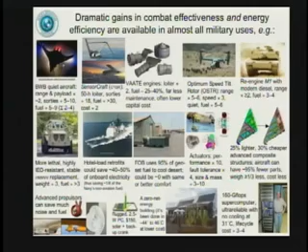Those are air conditioners ducted into uninsulated tents, and there are ways to keep people comfortable in the tents with little or no electricity. The list goes on like this, but you get the idea. This is not a trade-off between combat effectiveness and energy efficiency—it's energy efficiency and the technologies that yielded it producing major gains, often revolutionary gains, in combat effectiveness.

And that makes it an easy sell to the warfighters. Now suppose that we use these advanced materials and propulsion systems, for example, to fly Saudi Arabia under Detroit and Seattle. And suppose the Department of Defense were doing the same thing to transform its forces, to save billions of dollars a year, hundreds or thousands of lives, tens of billions of dollars a year in fuel logistics costs.

The key science and technology investments and procurement actions needed to do that could catalyze the transformation of the civilian car, truck, and plane industries, exactly as happened when military R&D created the internet, the global positioning system, the microchip industry, and the jet engine industry.

And it's a big prize. Imagine a world that doesn't care about oil and doesn't have to fight over oil. A competitive auto industry, cheaper oil, rebalancing American trade, global development, diplomacy. To be sure, we'd become more competent, more capable, more confident warfighters, but we'd have a lot less need to fight wars, particularly over oil and the instability it brings with it. It would be a safer world, and the Department of Defense's greatest ever contribution to its national security mission. Many people there now realize that.

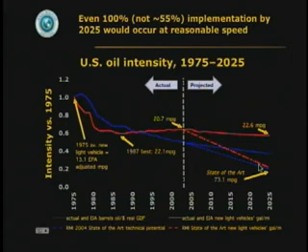And implementation's already underway via institutional acupuncture. We figure out where the business logic is congested and not flowing properly, and we stick a needle in it. It's the most ambitious thing we've undertaken, and it's going well.

We need to shift behavior in six sectors. Aviation is already underway. Heavy trucks led by Wal-Mart - based on our analysis, they are requiring doubled efficiency trucks of their suppliers. That demand pull brings those trucks into the market where everybody can buy them.

Military emerging as the federal leader this year in getting the country off oil. I'd say we're past the tipping point in those three, and there's strong investor interest and activity in fuels and finance. There was $71 billion of private investment in the clean energy space last year alone, worldwide.

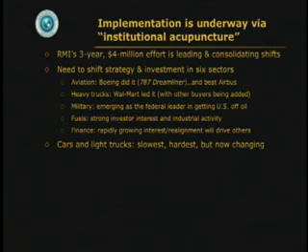The slowest, hardest, but now rapidly changing sector to shift is going to be cars and light trucks. But I think that move from Boeing to Ford, the dealer and union support, the creative destruction pressure, the leapfrog prospect abroad, is producing very rapid change. There have been some skeptics about this, but they're starting to pay attention.

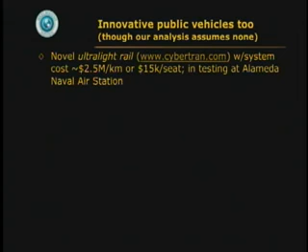And I'll end with a couple of other thoughts. The same innovations apply to public as to private vehicles. We did not assume any shift to public transport, but you could do a lot of really neat things with these technologies. In fact, just with ordinary materials, ultralight rail...

A lot of people get out of their cars to ride the kind of surface subway bus system, express buses, because it's faster, cheaper, safer, more convenient than driving.

The Dutch have been inventing a superbus for the Beijing Olympics. Think a triple stretch limo made of carbon fiber with great aerodynamics, using a lot less energy than a TGV train or a maglev levitated train.

It runs down ordinary roads. The solution, of course, to our transport woes is not just technical, because transportation is a means - it's not an end in itself. What we're trying to do is get access to where we want to be. The best way to do that is to be there already, so you don't need to go somewhere else. That's called sensible land use, or as they say in Europe, spatial planning.

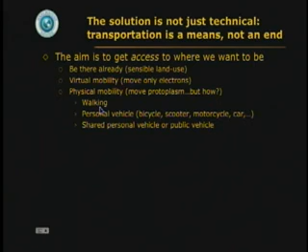The next best way is to move the electrons around and leave the heavy nuclei at home. The third best way is, if you have to move your body around, there are lots of ways to do it. All those who believe in individual mass transit, raise your right foot - have a personal vehicle, even a hybrid bicycle, a shared personal vehicle, or a public vehicle.

How far does public policy let all these ways of getting around, or not needing to, compete fairly - and not just transport modes? If we stopped subsidizing and mandating sprawl, wouldn't we have a whole lot less of it?

What if drivers got what they paid for, which I think they do, and paid for what they got, which they certainly don't? Most of the costs of driving are socialized. We don't have ways for trips and negatrips to compete fairly, but we're starting to.

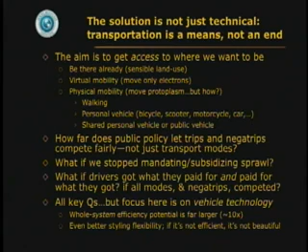These are all key questions. My focus here, of course, is on vehicle technology, because the whole system efficiency potential is enormous, and if you combine it with these other ways of not having to travel so much, so if we have great cars and need to drive them a lot less, we will be in much better shape.

This is like an endless onion that you keep peeling, only without the tears. If you look at transportation demand management, mode switching of all kinds, vehicle sharing, mobility and access-based business models, and demandating and desubsidizing sprawl, there's at least an order of magnitude efficiency gain to be had there collectively, besides, or going beyond just the 4 to 6-fold better cars.

Same in aircraft, 2 or 3 times, maybe 4 or 5 times with hydrogen, more efficient aircraft, but also big operational gains at the airport and the systems levels, and with point-to-point GPS-controlled flight in smaller hubless aircraft by getting real competition for gates and slots.

Air taxis, mobility and access-based business model, again, virtual mobility, another order of magnitude there. And the same with efficient trucks when you start getting into not just modal switching to trains, maybe even containerized airships, but also enormous logistics improvement.

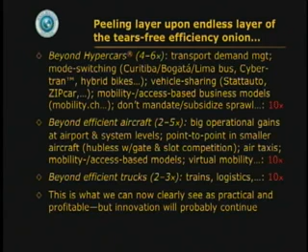These are just the things we can now clearly see as profitable and practical. There will be more innovation to come. The time to reinvent the wheels is here, and it's happening, because sometimes one must do what is necessary. Thank you.